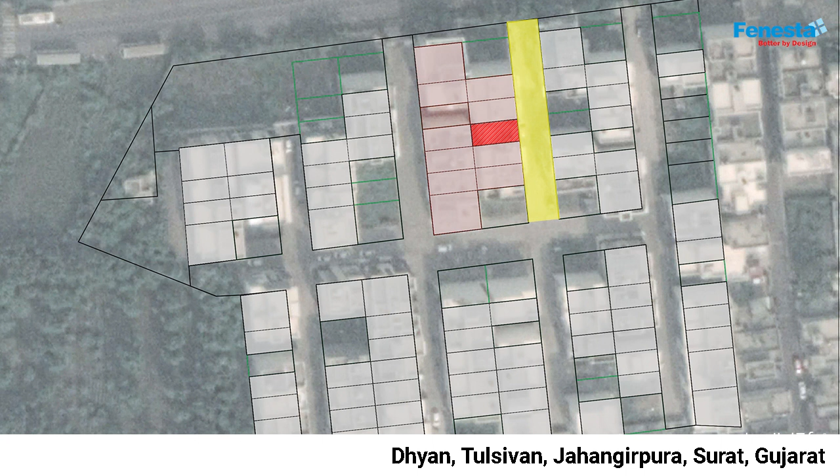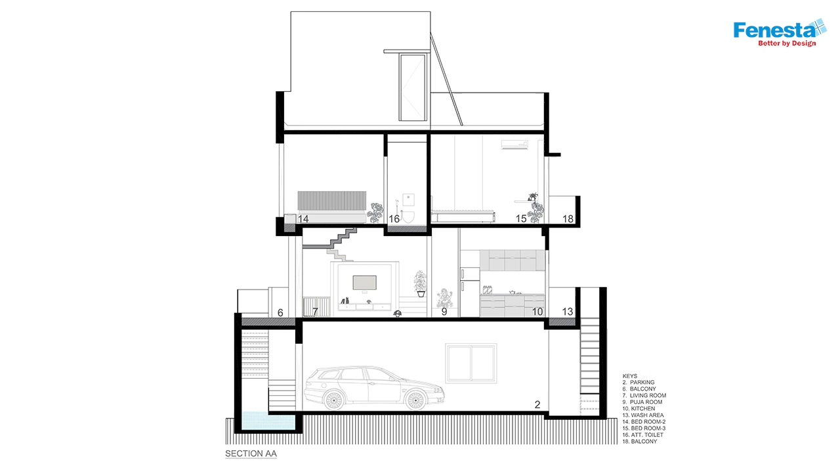Dhyan House is a project designed for a nuclear family of 3 members. From the exterior, this two-story structure stands with poise and distinction. The elevation was imagined as a break in the monotony of flat cuboidal facades. To achieve this vision, tactful projections and depressions are carved along the linear vertical edges. These are clad in different materials to give each section a different identity.

Deep textures afforded by exposed brick and slate stone build the foundation of an earthy material palette, which is followed throughout the residence. The exterior elements like the fabricated staircase are positioned in a way to maximize the light penetration and cross ventilation.

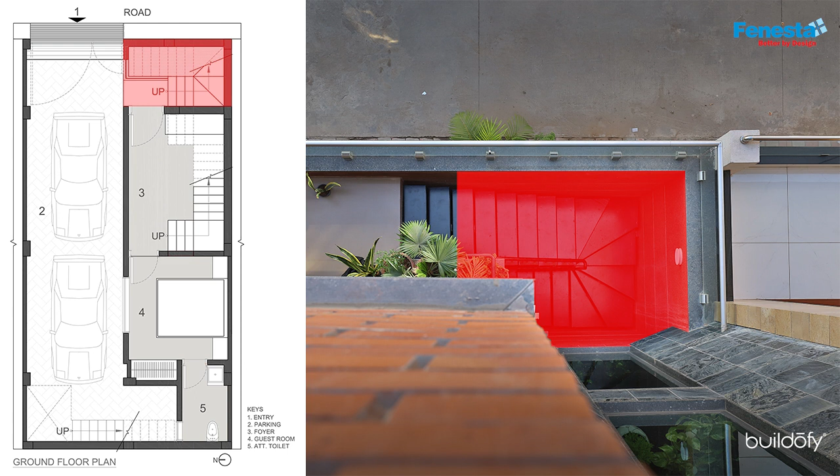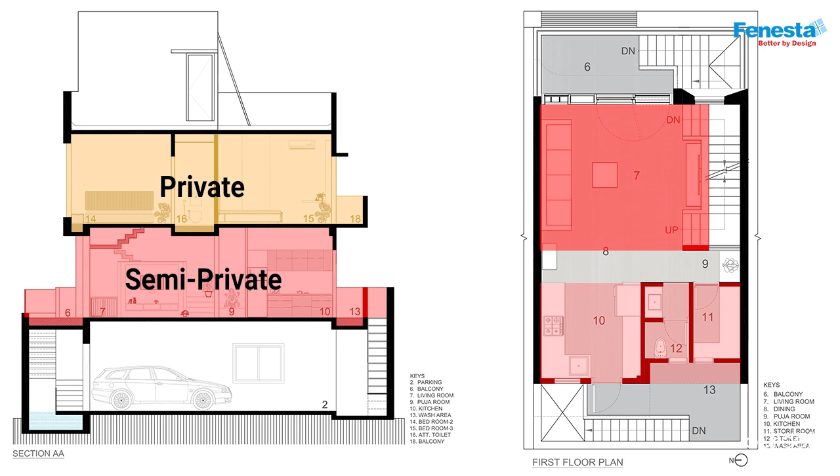Following a pragmatic layout, the ground floor has been used to house a lily pond, a car park, and a guest room with the external staircase entry, creating a segregation between semi-private and private spaces. The first floor has been dedicated to the main living area and kitchen activities, while the bedrooms are on the upper floor.

The common theme running throughout the designing process was to create unhindered and airy spaces that flow seamlessly, and unrestricted floor plans are formulated by minimizing the use of interior partition walls. This decision led to a layout that optimizes the space usage as well.

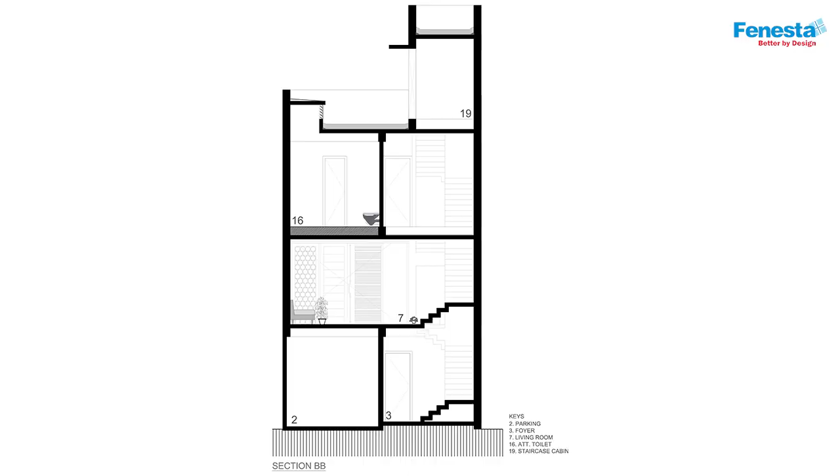Further, the vertical connection was also kept permeable and light by introducing a fabricated MS staircase with wooden treads resting solely on a central stringer beam instead of risers. The transparency provided by this staircase helped create a more expansive space, and the light it allowed to pass through illuminates the entire stairway core. This staircase acts as a delicate element which binds the different floors together.

The spirit of the house is strongly Indian in character and is expressed by the use of natural and earthy materials like brick, slate stone, and sandstone as a backdrop for wooden furniture. These warm exposed textures and tones in the interior, along with the minimalist furniture, make the spaces inviting and comfortable.

The entrance door with louvered screen makes an interesting portal with its wooden body accented by a unique metal handle. Wooden and metal doors and circular jalis allow diffused and regulated natural light to enter while also acting as a screen to ensure security and privacy. Details such as custom spherical handles on the desk, subtle curves added to the railing, and other wooden frames elevate the interior spaces up a notch.

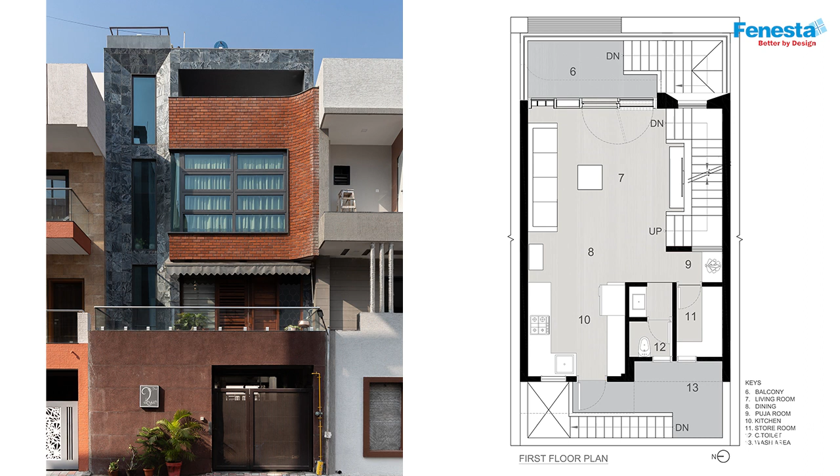The narrow site itself was an interesting challenge. The oblong shape of the site combined with the absence of margins left by the neighbor led us to tailor the layout in a way that would maximize the light and ventilation from the limited front and rear facades. Instead of allowing the constraints to limit the layout, we decided to use this as one of the parameters to define and shape the design itself. This allowed in conceiving rational and aesthetic spaces and elements.

An efficient layout with the use of intricate components and materials, utilization of natural lighting and ventilation, and the vision to create an eloquent home collectively bring this striking residence to life.